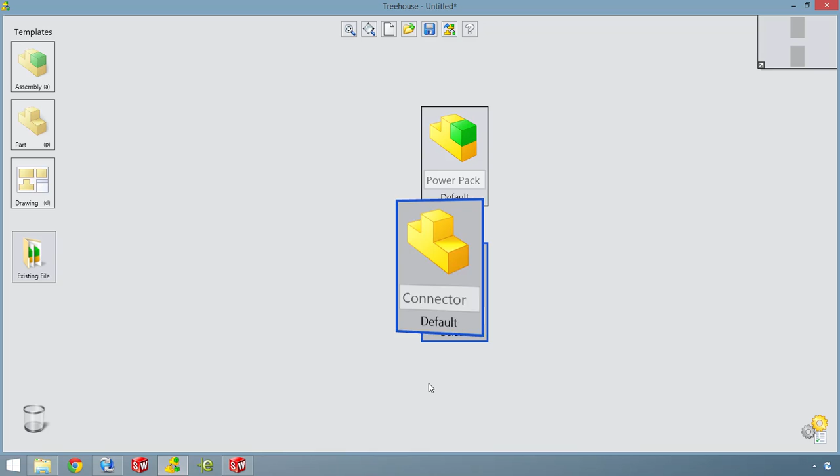Configurations can also be created as part of the structure. This makes it clear to the designer what is required as well as which configuration is needed in this particular assembly. And since these are new parts, not existing ones, you can also add drawings to the pack to ensure the project is fully detailed for manufacturing.

Existing parts and assemblies, or standard parts, can easily be added to your structure by dragging and dropping a Solidworks file from Windows Explorer. A thumbnail of the part, plus all its custom properties, are clearly shown in the tree, so you can be sure you have the right parts in the right places with the correct quantities.

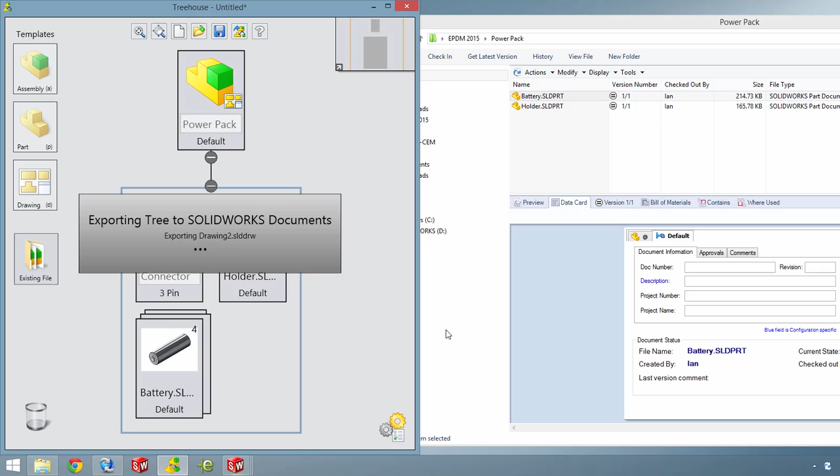Once your structure is complete or partially complete, you can export the tree to make a Solidworks assembly with all the parts, subassemblies and drawings that make up your design. Using Solidworks Treehouse with Solidworks Enterprise PDM is a great way to build your product structures, allocate design tasks to specific teams, and manage all the design data from here on in.

Looking at the data card for the connector part, you can see it has already been populated with tabs for each configuration as well as any metadata such as description. Also, looking at the check-in dialog for the assembly, you can see that Solidworks Enterprise PDM understands all the predefined design references between the assemblies, parts and drawings.

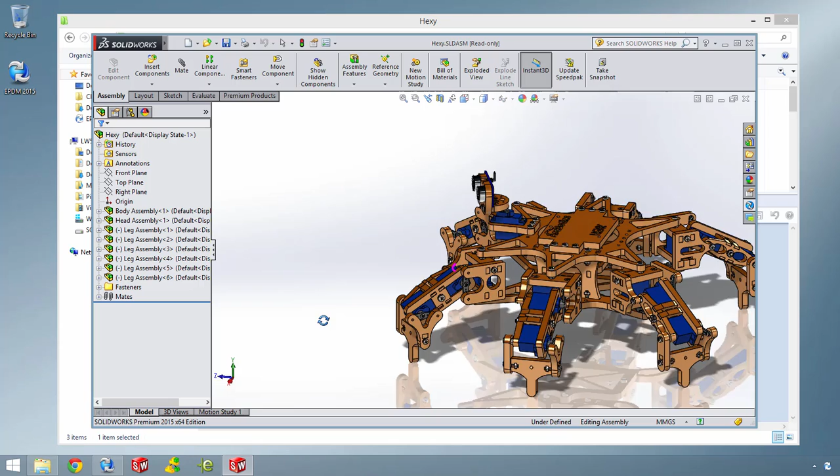Logging in now as another designer, you can see the 3D model of the robotic spider assembly that needs to have the new power pack added to it. As with any modification, the assembly must first be checked out before adding any new components.

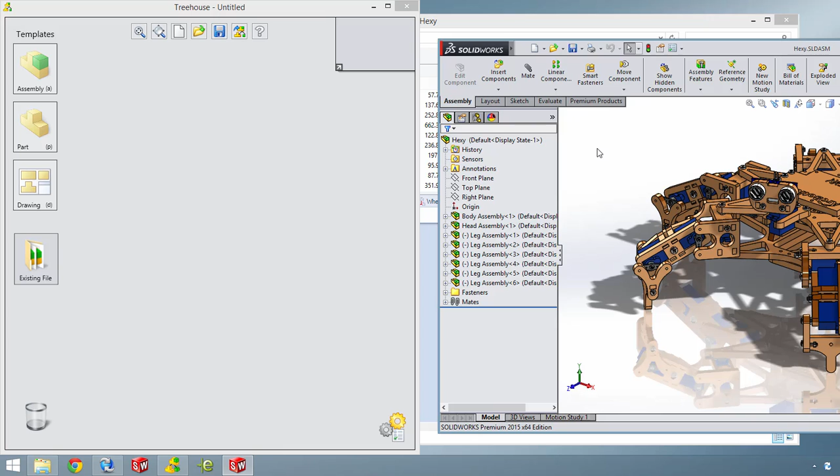The new power pack assembly could be added the usual way, but Solidworks Treehouse can also be used to edit existing product structures. This is especially useful for complex assemblies or to go through the process you saw earlier of adding completely new parts and subassemblies. Again, a simple drag and drop, this time of the top level assembly, shows the entire product structure, making it easy to see how this assembly is built up.

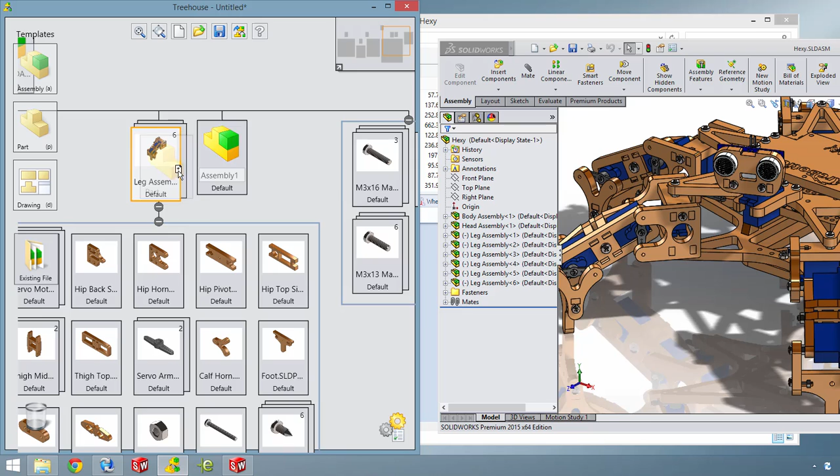Rather than adding the existing power pack assembly, we will add a new subassembly and a new part, giving them the same name as the parts the other designer is working on and has not yet checked into the vault. If the vault is set up to only allow unique names, then two people cannot work on two different parts with the same name, and this can be a big problem if a lot of work has been done on the parts before this error is flagged at check-in.

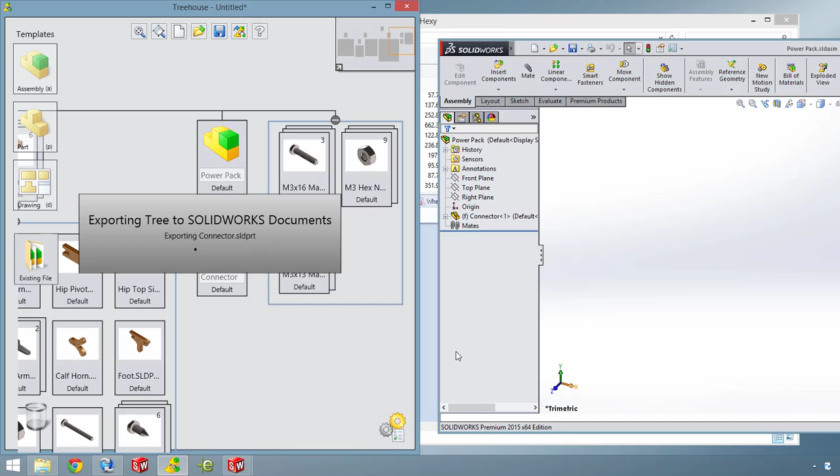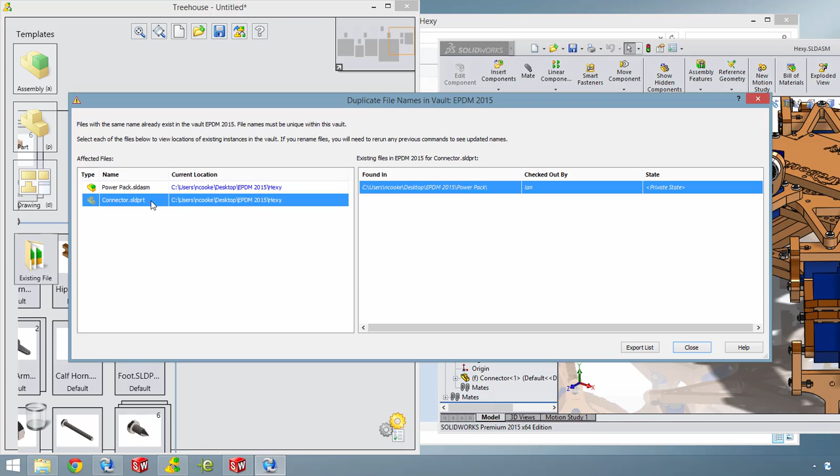As the assembly structure is exported once more, you can see the subassembly is added to the 3D model. You will also notice that Solidworks Enterprise PDM warns you that there is a problem. Previously, you had to do a search to find where duplicate parts are and what they belong to, but in Enterprise PDM 2015, this common error is overcome with a new duplicate parts dialog that not only tells you about the conflicts, but also tells you exactly where they are, saving you lots of time and head scratching.

Since these parts can't be checked in, they must be renamed, but in this case a simple undo gets rid of the parts from the assembly completely. Notice the new version column? A completely redesigned set of icons and more meaningful information makes it easy to know if you are using the correct versions of all your files and if you need to get the latest versions or not.

The two rogue files are still there. If you try to check these in, the check-in dialog also now has links to that same duplicate parts dialog. This issue of duplicate names is compounded even further if one or more users have created files with the same names and have not yet checked them in.

SOLIDWORKS Enterprise PDM 2015 provides a new state called a private state that lets authorized users see what others are creating before they've committed them to the vault. That way, you need never be in the situation where multiple users are duplicating effort or part names.

Many elements of the Windows Explorer interface have had a major overhaul, where data is displayed in a tabular format, like on the Contains, Where Used and Bill of Materials tabs. Clearly defined cells separate columns and rows, and all 3D CAD files have a pop-up thumbnail image so you know what you're looking at. The BOM Compare tool now makes it easier to understand the differences between product versions.